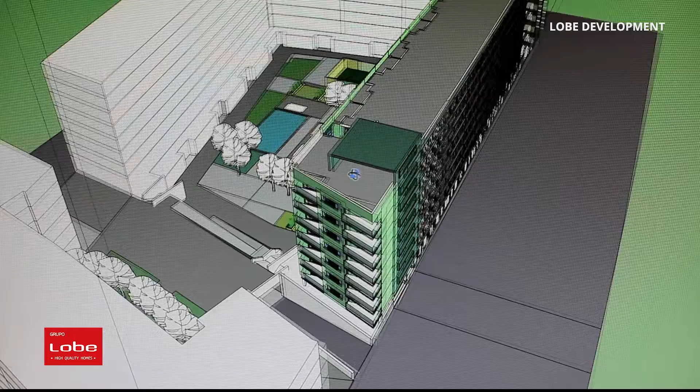Traditionally, development companies have calculated construction costs to study the feasibility of new projects, making estimations that are far from accurate. This tends to transform into significant departures from the initial estimated costs to the real cost of implementation, with a knock-on effect not just on construction costs, but also on implementation lead times and the quality of the completed housing.

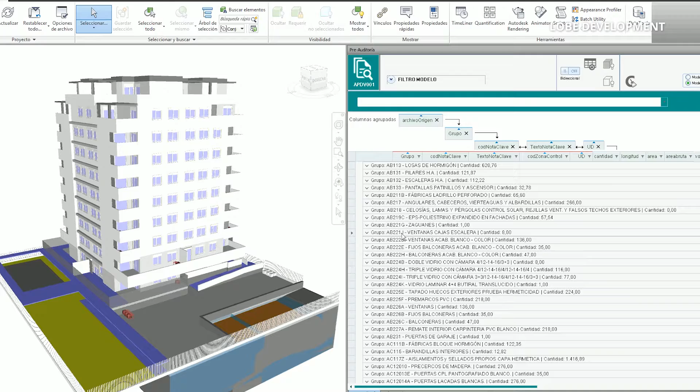At Grupo LOBE, we use a model that integrates all the agents involved in the process into a single team. Alongside efficient use of new technologies, we attain significant control over costs, which enables new resources to be used where they're really needed, on housing quality and satisfying those who purchase them.

During the initial stages, we're focused on finding land in areas where there's a potential housing demand. With support from our commercial and marketing team, we undertake market research that allows us to design housing in accordance with the needs, preferences, and economic possibilities of our future customers.

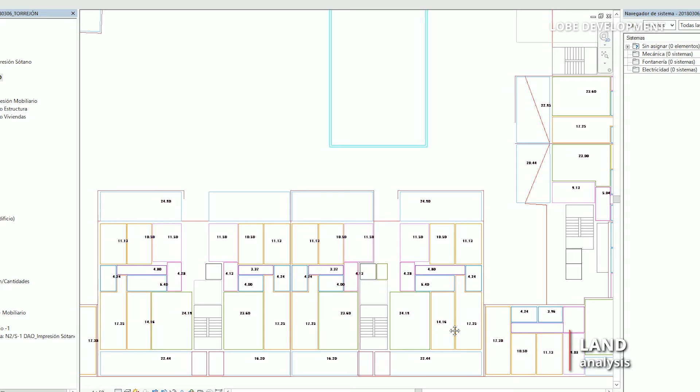Analysis of each plot begins with an overview of the development, which requires extensive knowledge of all the parameters that will affect it, whether contextually with its surroundings or in terms of urban or legal issues.

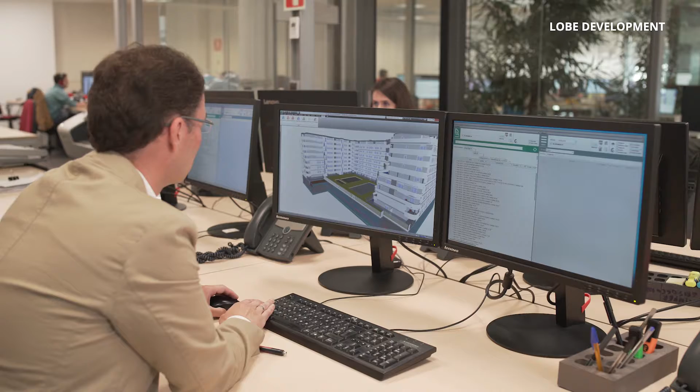When the housing under consideration meets our own design and quality requirements, we move on to the next part of the study. Here we start to profile the development project. This becomes an indispensable tool in the work done through the depth of knowledge and control achieved over the project, the result of the synergy between our development, architecture, and manufacturing teams.

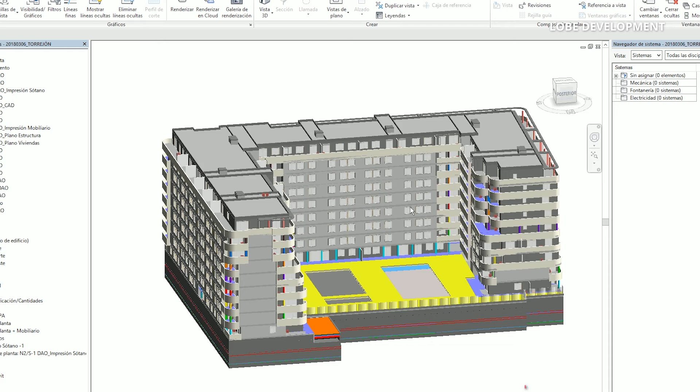Our methodology enables us to assess projects flexibly while maintaining a solid base. This is achieved through detailed cost quantification and considering all the factors involved, thus eliminating estimations. Hence, it takes us just two weeks to move on to analyzing feasibility.

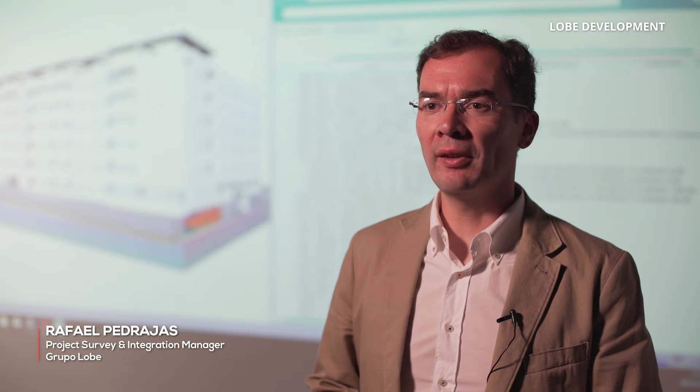This detailed, real information on the development project enables definitive decisions to be taken from data in the concept and specification definition stages, in addition to analyzing any repercussion on the economic feasibility of a development.

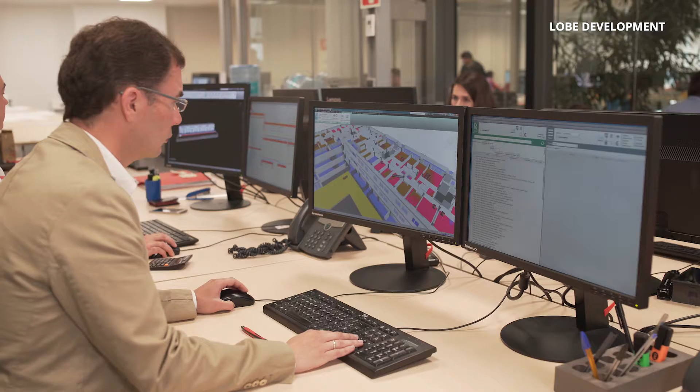All this information is extracted from the project and pursued across the coming stages. This is achieved thanks to having a development project linked to a powerful database, which stores and enables access to real-time information by means of constant feedback.

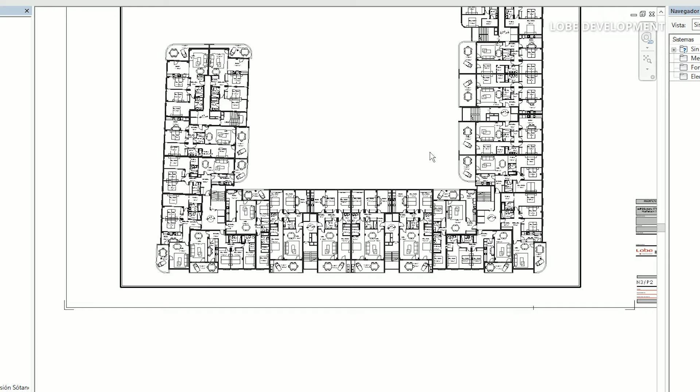This allows us to manage all stages of any project. In turn, from this development project, we obtain information for future processes, such as the pursuit of the basic project or the creation of the commercial dossier.

This means pre-sale can start in record time, while removing any possibility of errors or information loss in the communications process. A quantitative and qualitative script is thus created for the pursuit of projects in this section.

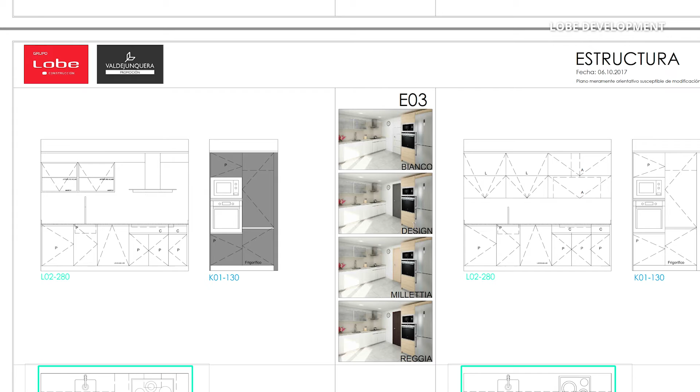Equally, we're ahead on correct decision-making thanks to real data. We have a highly detailed project through automated economic quantification by means of assessment and standardization of construction options, with the resources necessary for production and ready to be managed.

Hence, we have a real estate product with high-level marketability, design, and energy efficiency. Grupo LOBE: quality, design, and sustainability.